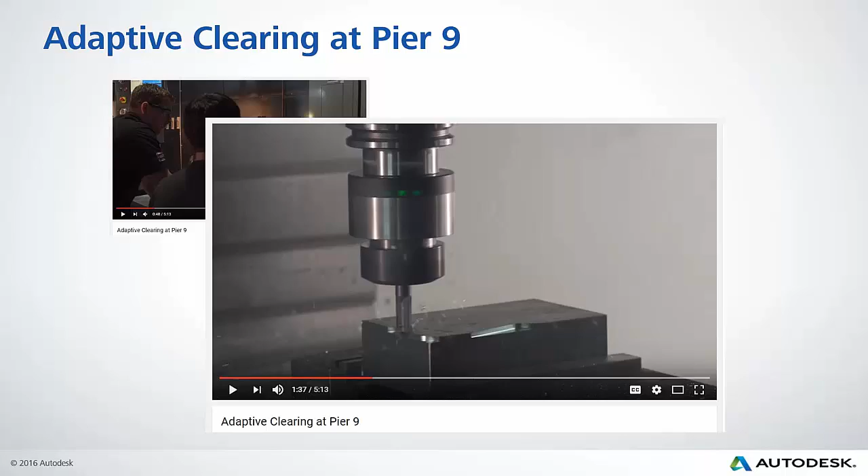What they found was the traditional roughing toolpaths use an offset from the geometry you selected. And those offset passes, that's what your step over is going to be. That's against our optimal load inside of adaptive clearing, where you're keeping the constant radial tool load.

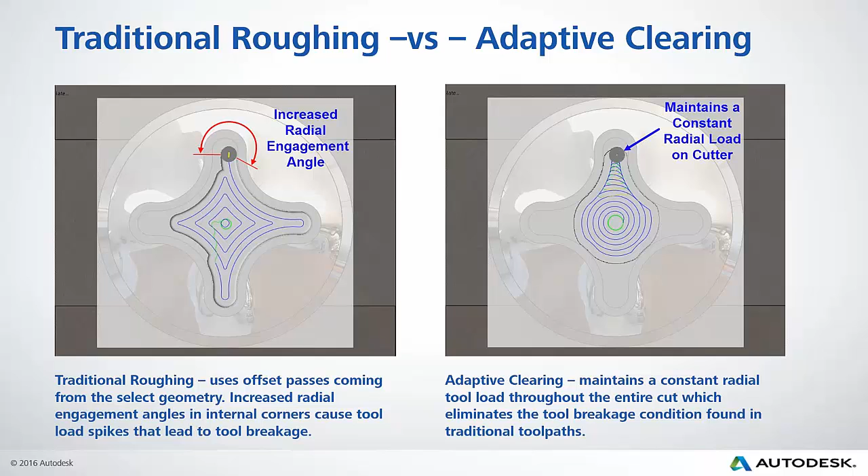So when you take a look at it, traditional roughing increases that radial engagement in the corners, especially when you go into those tight or acute corners, and you'll find that tool gets literally overloaded. It gets buried in the corner, and that's where you'll have a breakage of your tool. Maintaining that radial tool load throughout the entire cut, you can get into those corners keeping that same load on the tool. You're going to reduce or eliminate any of those load spikes that cause it to break. Really good information.

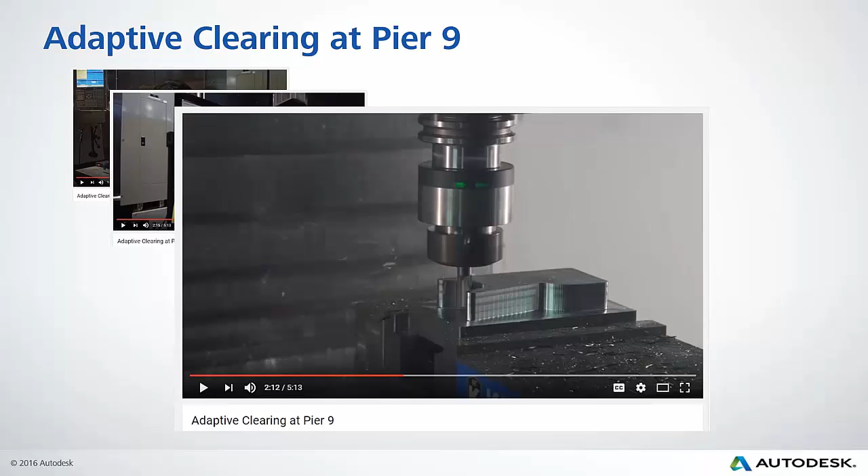This is the feedback. They had constant load, always the same load when the tool's in the material. So they're able to run at higher spindle speeds. You can keep that tool down in the material as much as possible, use as much of that flute length as possible, because you're able to run at a constant chip load. In other words, you're keeping the axial engagement and the radial engagement at a constant small cut, a small bite as it goes along. Really efficient, keeping those load spikes down.

Another thing they show in the video is walking through ways that you can find your feeds and speeds and set up the right feed rate, running your spindle a lot faster. We find that if you run your spindle a lot faster, you're able to cut the material and you're not getting as much heat in the tool. So if you optimize the right tool with the right material and get the right feed rate, you're going to get those parts off the machine a lot quicker, and you're going to save your tool life.

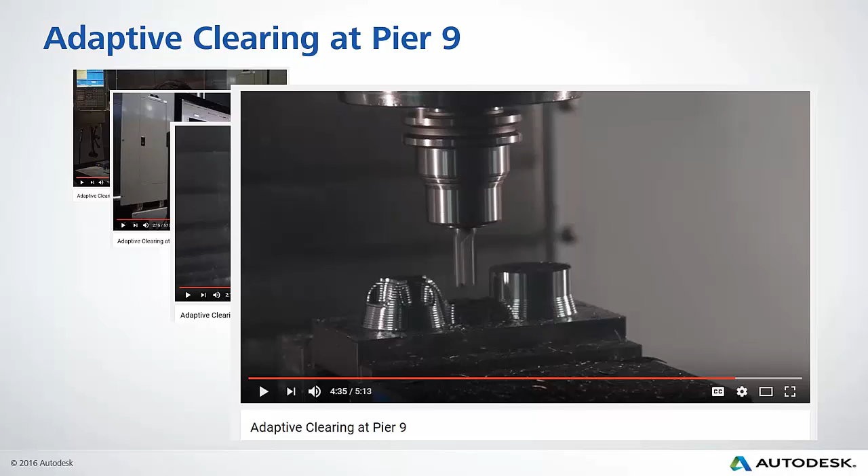They also looked into the step-up pass we use in the 3D to keep a constant amount of stock in the model. And also, when there's a transition from one place in the model to another, keeping it safe and trying to keep the tool down. So these are really great places where we can help reduce those cycle times and increase your tool life.

I want to really hit some points. There's a lot in there that we can cover. It's going to be tough to do in one webinar, but I'm going to try to hit some of those points where we find a lot of questions and things that I think will be beneficial for you. Using adaptive clearing for facing, using the tool shaft and holder to check that adjustments are made in the toolpath so that we're not going to gouge the material or our part. And also our stay down level. We're going to explain more into what that stay down level means.

Okay, so let me bring up my SolidWorks and we'll get into the toolpaths. Just to give you an idea, I have some of these toolpaths on this part right here. I'm going to zoom in a little bit. Just like the traditional toolpaths, you'll see they're offset toolpaths. In other words, it takes a step over that's offset from the geometry you selected.

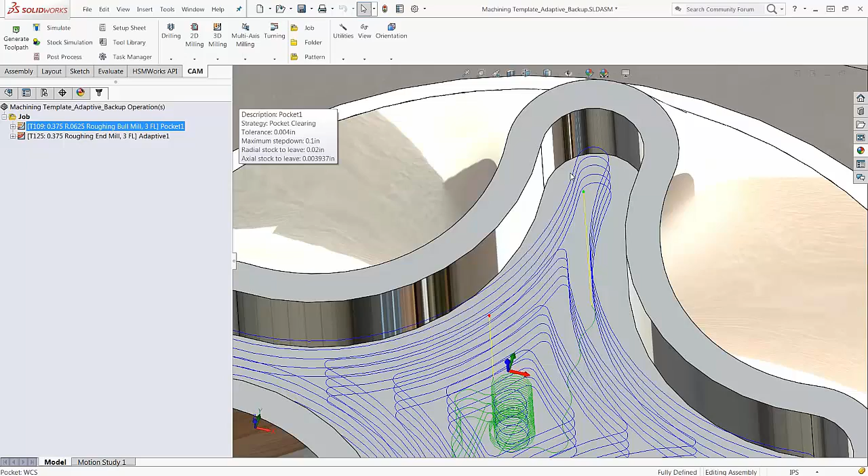Traditionally, we'll take a look at the first time they work with these offset toolpaths, trying to get it to work, but you notice when it gets into those little corners there, as we saw in the diagram, that's where a lot of the load is on the tool. So what they'll do is they'll run really slow. They'll have the tool go in really slow into those corners. They'll slow their feed rate down at the machine and work their way through the pocket. And you'll also have shallow step downs to try to keep the tool from breaking.

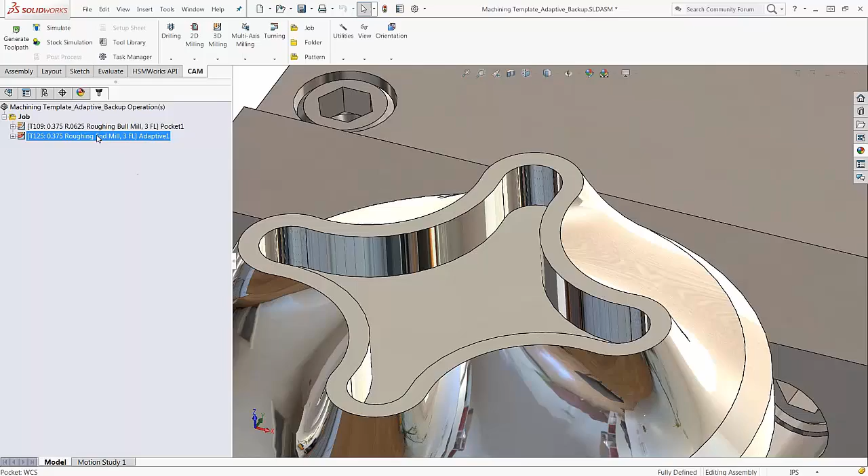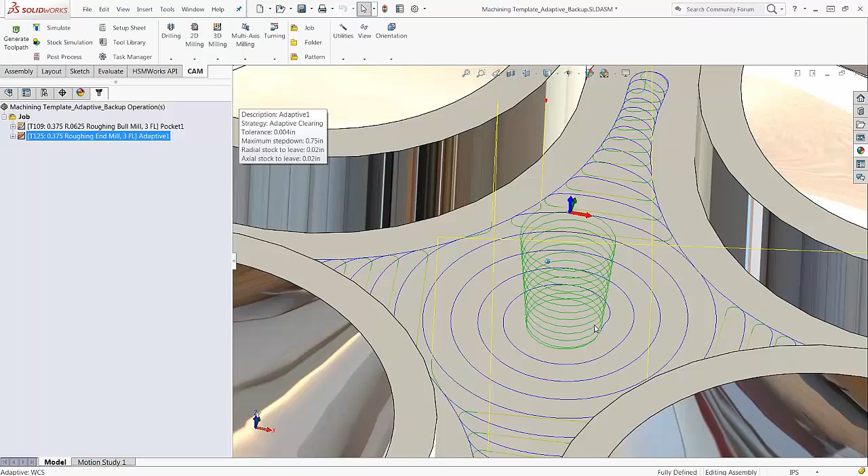So what we do in our adaptive clearing is we helix down into the material using as much of that flute length as possible. As it helixes down, I have a taper helix here, which helps that swarf get out as you're working your way down into the material. It gives room for those chips to fly out, as well as it prevents recutting of the chips and work hardening. So as it reaches down to the bottom, it keeps that same constant chip load, that same radial engagement the entire time as it works its way into the material.

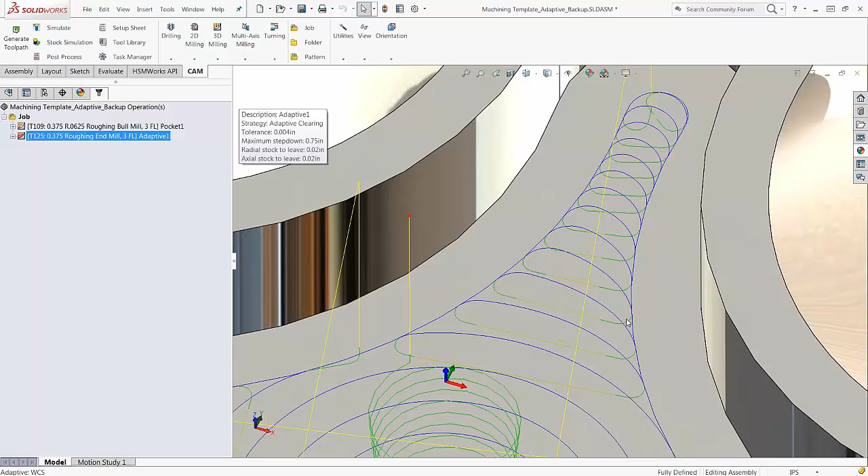So you can run at your higher feeds and your higher speeds because you're keeping that same size chip the entire time. As it works into those corners, again, that same size bite, and where it can't keep the same size chip, it backs out, comes back in for another bite. And that's how the adaptive clearing works, really high efficiency clearing. So as it works its way into that pocket, you're not going to see any burial.

And when it reaches a point in the corner of the pocket where traditionally you would have a broken tool, this is actually going to take that small little bite. So it's not going to bury the tool. You'll get your parts off the machine a lot quicker. You can run higher speeds, and you can trust that it's not going to give you those load spikes in the corner. Really good toolpath, really good algorithms, high efficiency machining.

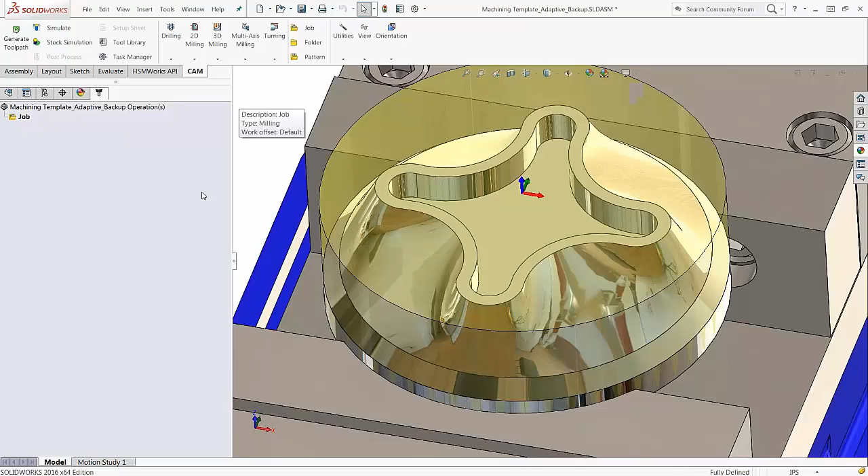So let's take a look. I'm going to walk through setting one up. So let me delete these out real quick. I'm just going to right click, delete. I'm going to start, this is my job setup. So I'm going to add a 3D adaptive clearing toolpath.

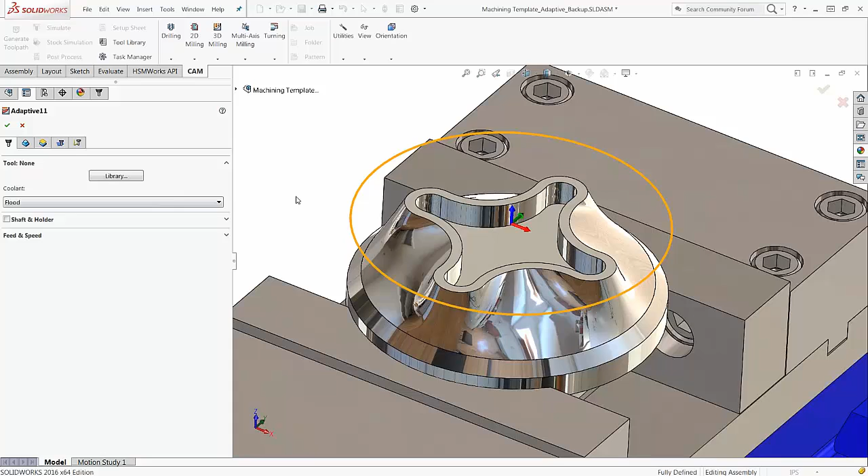So if you're new to working with HSM, and you're new to adaptive clearing and any of our toolpaths, one thing you'll find is they're really simple, really easy to use. It's always the same workflow as you go through setting up your toolpath. So all of our toolpaths have the same workflow, really easy to learn. So working from left to right, I would select a tool. If I go to library, I can select a tool out of a library.

I suggest making a library that matches the tools that you have in your machine, and you can set it up by machine or by material. For aluminum tools, I have my feeds and speeds set up for my aluminum tools. We have a library here that was set up for Pier 9 using the same library that they use there for the tools that we work with. So you can also import and export your tool libraries.

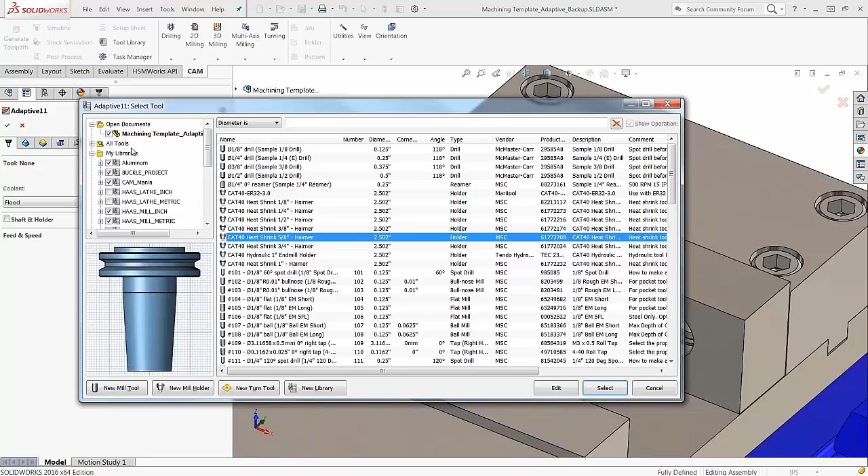I'm going to select a tool out of this library. These are tools that I was working with previously. I'm going to select it, and it brings it into my graphics view so I can see it. Actually, you know what, I want to face this off first before I get into those pockets. So I have that stock there that I want to remove from the top of my stock down into the part. So I'm going to choose a face mill from my library into my adaptive clearing toolpath. Now with a face mill, I can use adaptive clearing to do a facing toolpath.

All I'm going to do is go over, and we'll talk about more of these things as far as the geometry and the heights are concerned. Actually, let's get into the heights. What I want to do is change that. Instead of being model bottom, I'm just going to change it to model top. So I'm looking at from the top of the stock down to the model top.

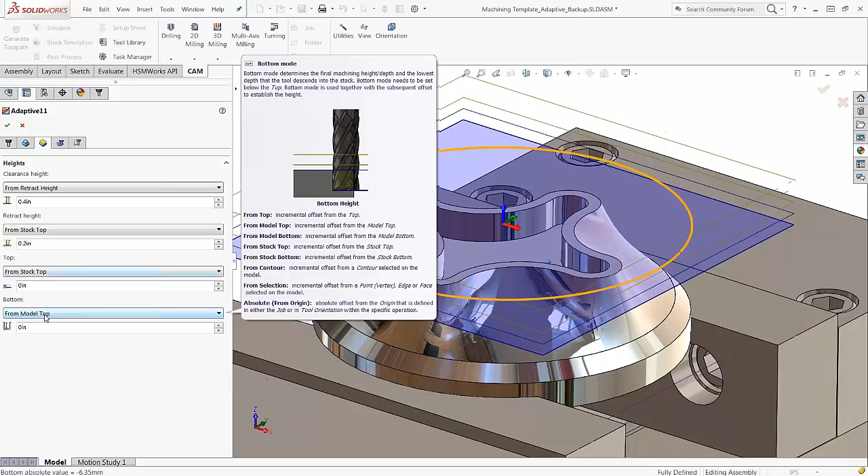In my passes, again, we're going to talk more about these things, but you see this yellow exclamation point giving me a warning saying my step down is a lot more than the flute. And I have a face mill, so I don't want to go too much past 1/10 of an inch, or else I'm going to be at the top or the bottom of the screw holes, and I'm going to pull my inserts out. So let's say we do 50 thousandths step down. We're going to talk more about these other settings, but I'm going to leave it at that. I'm going to say OK.

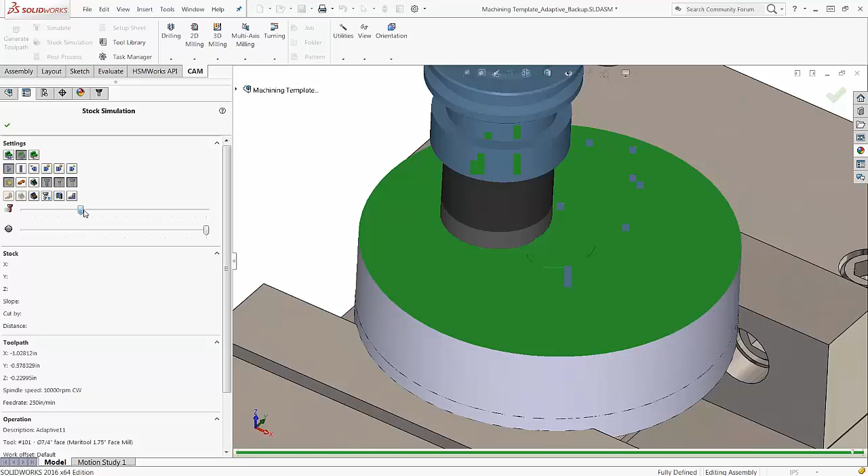Okay, and we get this adaptive clearing facing on the top of the part. So I'm going to simulate it so you can see it. Go to play, and it's going to face off the top of the part using that adaptive clearing. Really, really efficient way to face off the part. So we have a traditional facing, but this is a good way to do it. It's a neat trick to be able to face off the top. Okay, and I like the way that that worked. I want to save that. I want to use it.

There's my report. So what I want to do is I'm going to create a template. So I'm going to right-click on that toolpath. I'm going to go down to store as template. So storing as a template, I can save any toolpath and I can reuse it later. I did it earlier, but I can overwrite the one I have here. But you can save a template.

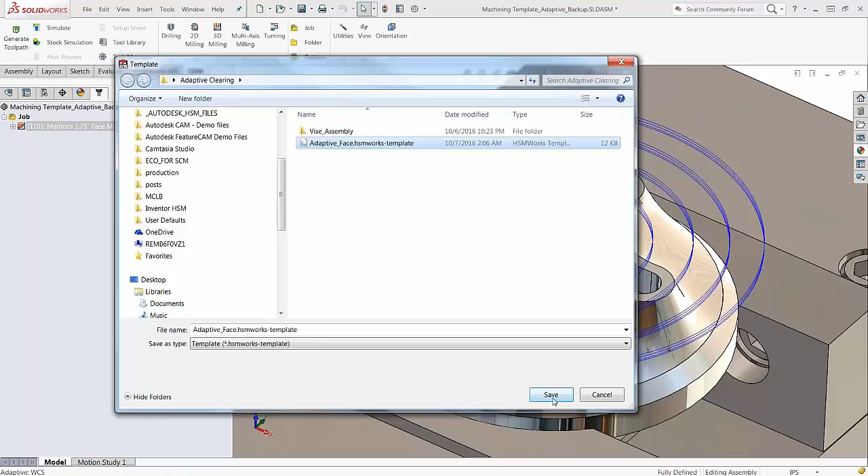It's a good idea to create a library or a location, maybe even on your network, that you can share them. But it's a good idea to create a place where you can save your toolpaths. So as you create them, you don't have to recreate the wheel. You just reuse what you've done before. In this case, we can save it as an adaptive face. I'm going to say yes. And now, I'm just going to delete it for a moment just so I can show you.

If I bring in a part and I want to be able to get that adaptive on it, I just right-click. I'm going to say create from template. I can choose where that template would be. In this case, I have it set in that adaptive clearing folder. I can bring it right in. And all I have to do is regenerate the toolpath, it recalculates, looks at the part, and applies exactly that same adaptive face.

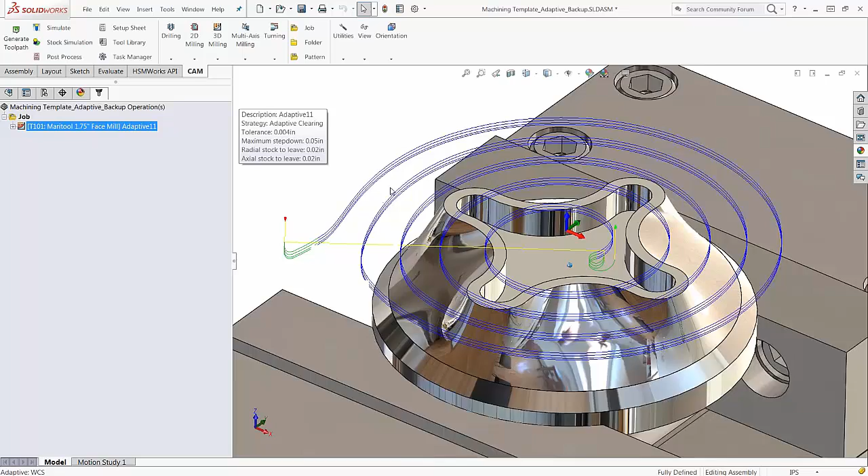Wayne, I'm going to jump in because there's a great question here. A user wanted to be able to apply a finish pass in Adaptive, and templates is a great way to do that. So you could have done a derived operation. I just want to point out that a template can be a series of operations too. It doesn't just have to be one operation. So you could create a template of your roughing operation plus your finishing operation together.

Absolutely. That's a good point. Thanks, Al. So you can do that. You can create your derived operations. You can have your roughing and finishing operations set up, and then save all those as a template and bring them into your part. So I'm going to walk into another 3D adaptive.

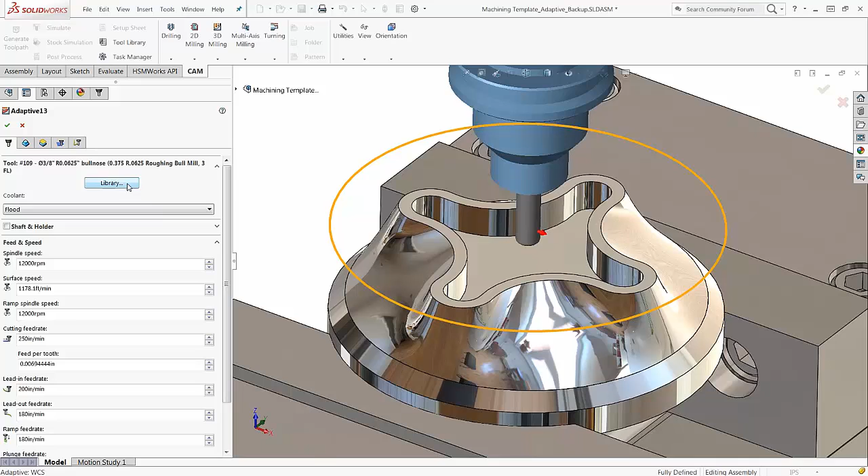I want to be able to cut the part. I want to cut inside the part, so I'm going to go and select another tool out of my library. I'll use this 3/8 bull nose. Select it. I can see the tool, brings it in. Now, if you're new working with the toolpath, working from left to right, we select the tool out of our library. The next step would be selecting any geometry. Now, for the 3D toolpath, it's really about setting boundaries where we want to keep the tool in that area.

So when you select different boundaries, we have our bounding box, which is relative to the X and Y of your WCS. It'll give you a box around the part at the extents of the part, as you can see in the picture, and that'll be where the tool will be kept. And we also have the silhouette, which is a projection of the shape of the outside of the part, and that's what it's going to use. We can also select specific geometry. Now, if we select none, it'll use the stock, as you see here, as a contour on the stock automatically.

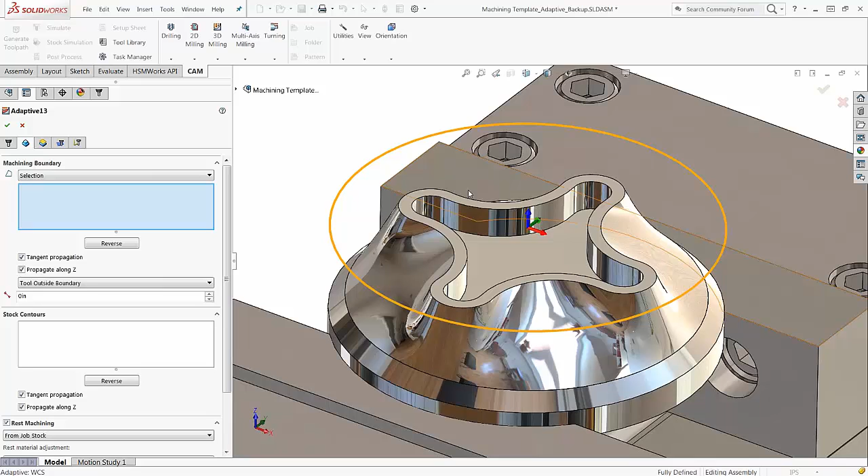So here I'm going to do a selection, and I can keep the tool. I just select geometry right off the model. It projects it into the plane where I'm going to be working with it. And now I'm going to use that as a boundary to keep the tool inside that area.

So I can keep the tool inside. Other settings we can do: rest machining. Rest is remaining stock, is what rest is meaning. And we can do that remaining stock if we have previous operations. In other words, we have a previous operation which is our facing, but our facing didn't do anything inside that pocket. But we can do previous operations.

We can select specific operations. We can also work with a file if we have another file. Pick solids. You might have a solid model that represents your previous operation, or even from your job stock. So we're going to leave it at job stock so it recognizes the stock that we're trying to remove into the part.

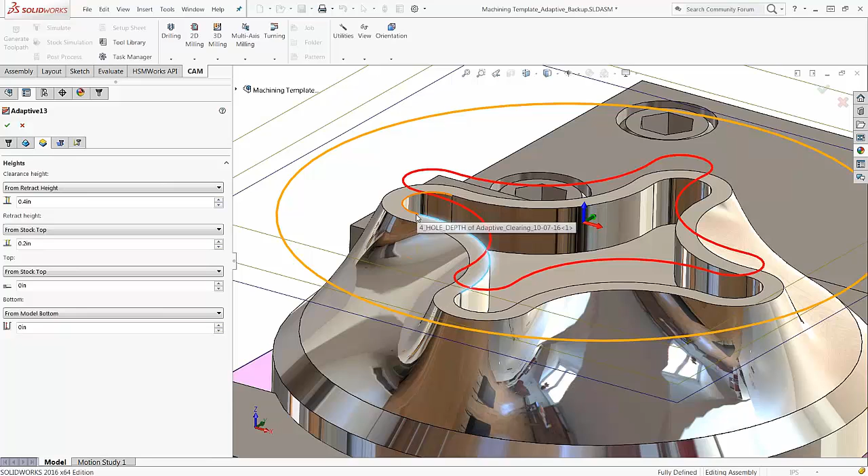Okay, before I do, I want to make sure that it doesn't cut anything above the part. I know we already machined off the top of the part, but I want to make sure that the tool stays down inside of that pocket. So what I can do is, instead of choosing my bottom from model bottom or my top from stock top, I can say from model top. So it's real easy to work with the heights.

You can select heights off the model. You can select specific positions off the model. You can also choose the model itself to regulate where the height of the tool is in the bottom of the tool, where your clearance and your retract will be. Really quick and easy to use.

We're going to get into our adaptive clearing a little bit as far as our passes are concerned, but I want to show you right here is where you can set your optimal load. We talked earlier about setting that optimal load, keeping that consistent radial engagement the entire time. If we right-click in this field, we can go down to Edit Expression, or you can hit F2, and this brings up the expression window, and this is what's driving that optimal load.

It's the tool diameter of the tool we brought in multiplied by the factor here of a quarter of the tool diameter. We can change this if we want to get a little bit more aggressive. We can make it 35.

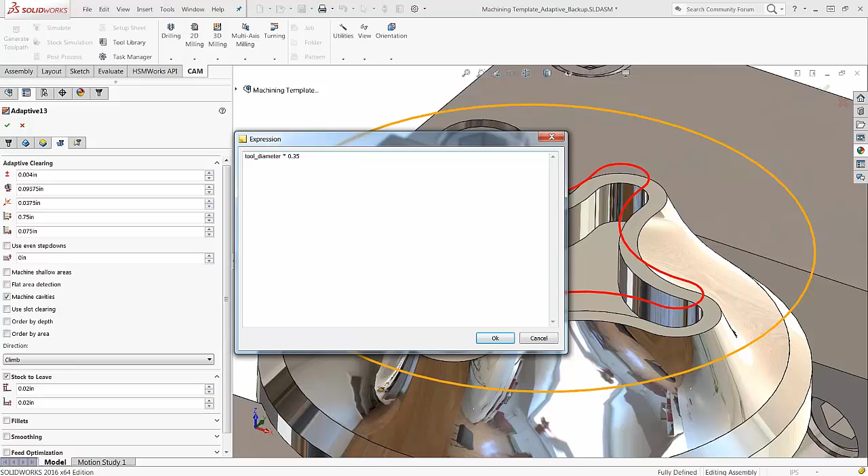Again, work that out. When you get your tool and you find the right tool for the job and you have your manufacturer's recommended feed rates to start with, also take a look at that video that Al put together with some tips on being able to build up your feeds and speeds to match what you're trying to do. But here is where you can fine-tune that, and you can put that information in to keep your constant radial engagement. This is what's driving it. So I'm going to say OK, it calculates, and it gives me that new optimal load.

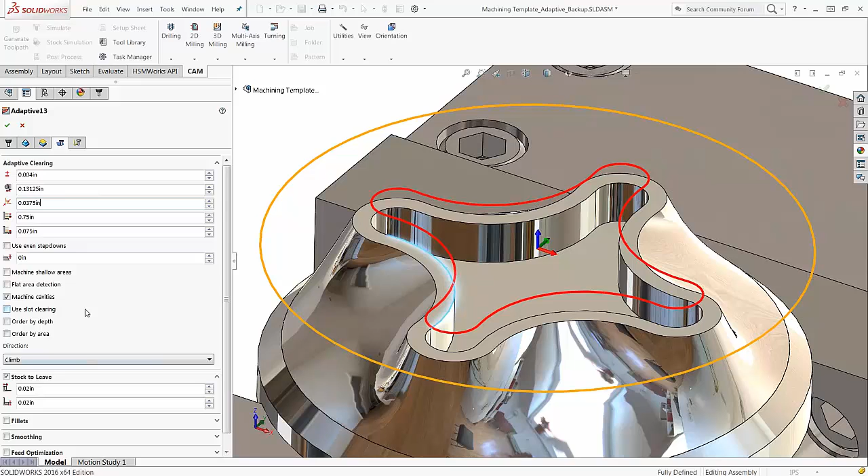So I want to point that out. You can do that on all of these different fields. This is the minimum radius that the tool will look at when it gets into the corners. If I hover over, it should give me some pop-up: minimum cutting radius, and we'll take a look at the difference here. But again, this is when it gets into those corners, you can avoid having that tool go into a corner where it may not be most efficient to be able to remove the chips. So we'll walk through some of these when we get into the other aspects of the 3D. I just want to point those things out.

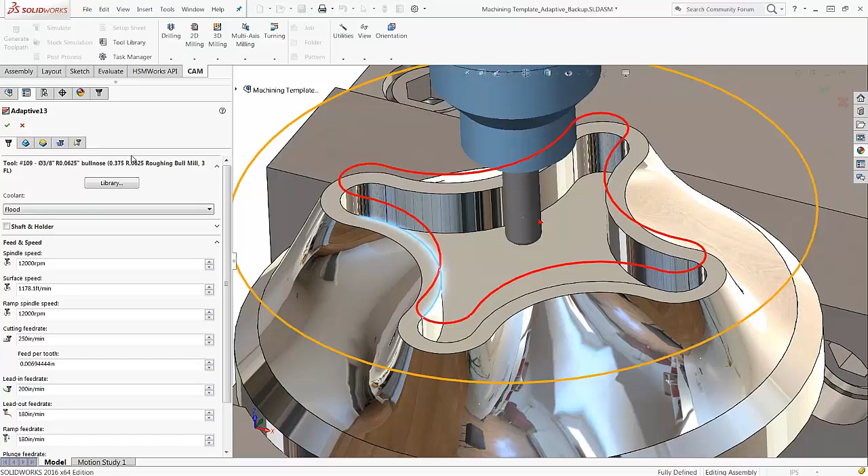So I'm going to leave it there. I'm going to say OK. It's going to calculate, and then I'll have that adaptive clearing on the inside of that feature. Okay, so I was able to bound it. Now I'm going to right-click, I'm going to edit that, and I'm going to change it so I can cut the outside of the part. So all I'm going to do is remove my boundary and say none.

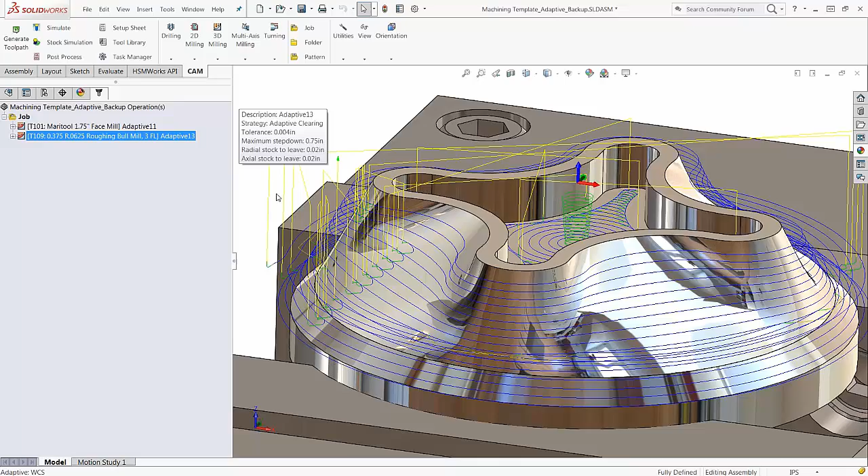Hit the green check, it'll calculate, and it's going to look at everywhere on the model where it can efficiently remove those chips. It's going to try to keep that tool engaged with the model as much as possible without interfering with the model, without hitting the model. So it really respects the model very well.

And if you notice, you see a lot of these retract moves are here. Actually, I'm going to show you, there's another place where we can see a lot of them too. So I'm going to go to edit, I'm going to go into here and I'm going to show you. Down here we have our linking parameters. Linking is where we can change those retract moves that we see here.

I want to point out too, before we go to change those, that the tool is going to work its way. The algorithm is going to take a look at the most efficient passes. It's going to work its way up the side of the model here, and it's going to try to look at where it can leave the most efficient stock, or at least a consistent stock, as it goes through to remove the chips. So we can take a look at that.

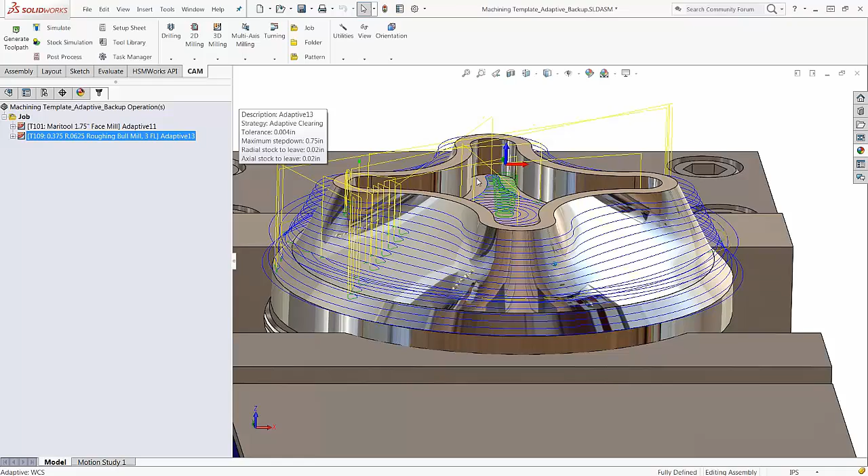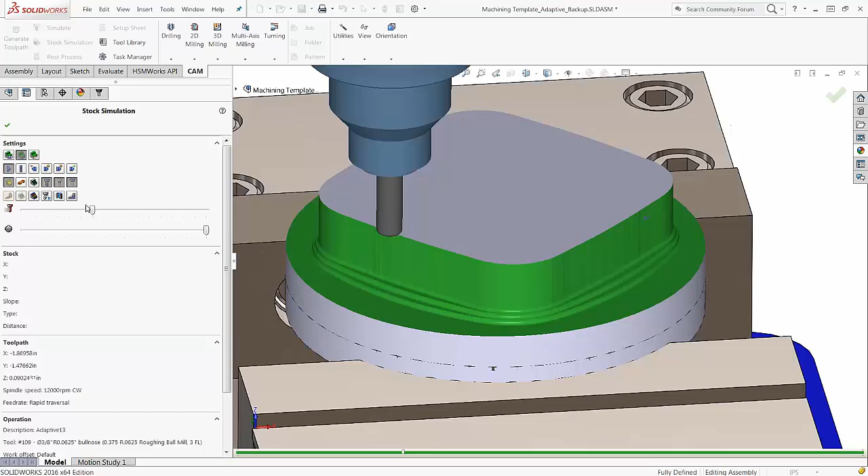I'm going to do a stock simulation real quick just to show you as we walk through. So it's using as much of that axial engagement as possible, as much of that flute. You see it's getting pretty close to my holder there. Okay, we're going to take a look at another setting for that in just a few. But you see it started where it can get the most efficient cut going around the part as it steps its way up. Looks like I hit down here.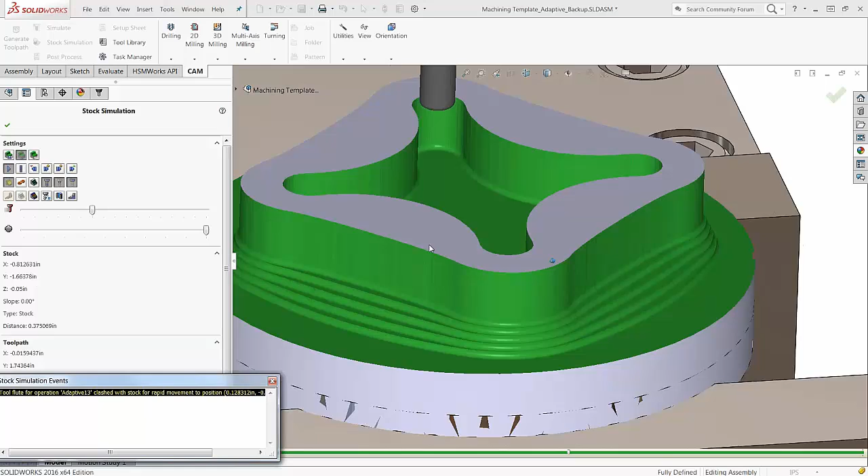I don't think I selected to do the face, and that's why it looks like it hit. So I only selected the one toolpath, but if I select the face, you'll see that won't be there. But there it's working on the inside. Then it comes out and looks at the next level where it can get the most efficient cut. Okay, so there it worked up the walls, and it worked the inside, again, keeping the most efficient engagement it can.

Okay, so you might see some retract moves in here, and sometimes you might not want to see all those retracts. You want to see them more minimized. What you can do is you can edit and go into the linking parameters. Some of the questions that we get often are about understanding this, the retraction, the stay down level, and how we can adjust it to keep that tool engaged as much as possible in the most efficient way.

So when we look at our retraction policy, this is really looking at whether we're going to retract all the way up to the full retract level, or if we're going to have a minimum retraction. In other words, when it moves from one place, it's going to retract out to move over to another place where it can safely re-engage the material where it's making that most efficient cut, because it's going to avoid hitting any of those bosses or any of those areas.

We can have a minimum retraction where, instead of going all the way up to the retract level, it's going to find a really safe way to move around but keep the tool down as much as possible. Here, what we're looking at is our maximum stay down distance. Because with the adaptive clearing, it's going to keep reevaluating the material, the stock, and the part to keep getting that most efficient toolpath, to keep the tool engaged as much as possible.

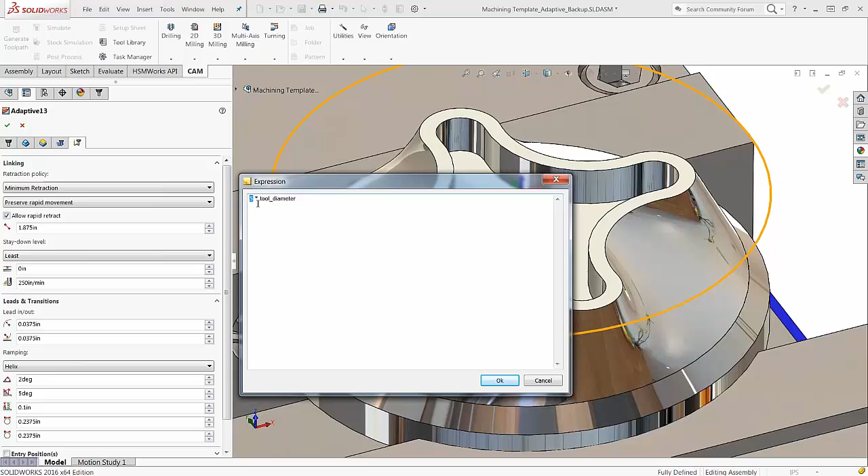It's a factor multiplied by the tool diameter. So this is the way it would come in as default. And if I wanted to make, let's say, 20 times the tool diameter, what I've done here is I've increased the area that it's going to look. So when it goes to retract from one spot in the material, or when it's cutting here and it can't efficiently keep cutting, it's got to move to another area, it's going to increase that area where it's going to look for another place to move in.

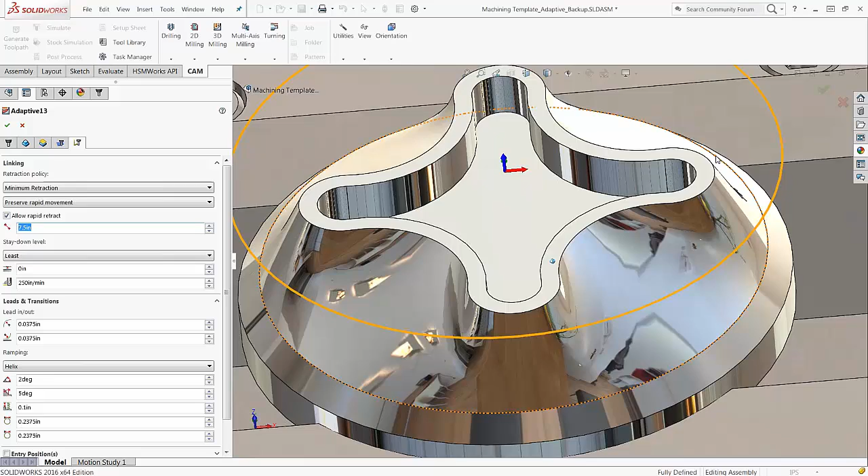So again, it's looking for that most efficient cut, the way it can remove the chips in the most efficient way, keeping the tool engaged as much as possible without hitting the model. So our stay down level, within that distance, we can tell it a certain percentage of that distance to stay down. So here it's looking at, if we did least is 0%, in other words, it's going to keep retracting as much as possible without hitting the model.

What we can do is we can increase this. Let's say 30%, we can do 50%, and we're doing 3 3/4. So if we're doing 50% of that distance, it's going to look within that 50%, that 3 3/4, it's going to say, can I stay down here? If it can't, it will retract and move over to the other area. So that's really what it's doing. But one of the trade-offs is you get less retract moves.

One of the main things that we do this for, sometimes you have a machine where your rapid speeds aren't that quick. Your machine might not be able to get your rapid up as close to your high feed. And so those retract moves take time. They're not as efficient. You don't get the part done as fast as you can.

So if you can have your tool stay down, move to the next area that's closest and more efficient, it'll do that. You can enable that with your stay down level, but that's really what it's doing. It's trying to keep that tool down so you're not doing those retract moves and taking that time. So it's trying to keep it down as much as possible. You can also say I have a specific feed that I'm trying to do as it goes from one area on the part and tries to stay down.

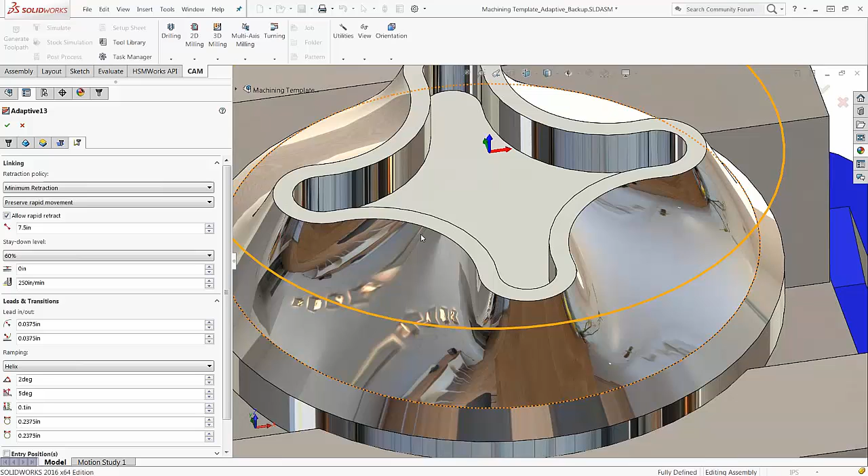So the stay down linking, for people who have been using it a while, there's a maximum stay down distance up top that Wayne was talking about. That's 7.5 inches. That's if it can just find a straight line between 2 points. But that's also an overall maximum distance. And then we have this new linking that's going to find the safe path, this stay down level percentage.

It'll find a safe path, and it'll jog through and it'll go searching. It's aware of the stock, whatever your stock model is at that time. So as much as you've roughed, that's the model it's using, and it's trying to find a way to get to where it needs to start the next cut.

Well, the way the calculation works is it first calculates the rapid movement that Wayne was showing you. It comes up, it comes over, it goes back down, that sewing machine, because that's a very fast calculation to find out how long that distance is. And then we know how long that is. So let's say that distance is 1 inch up, 4 inches over, and 1 inch down. So you've got 6 inches of motion. And now we set the stay down level to 50%.

So that's saying if I can find a stay down distance that's half as far as my rapid distance, I want to do that. Why would you do half as far? Well, usually your rapid is 2 times faster than your cutting move. So it says 50%. So it starts looking, and it's trying to find something. It's hunting its way, and it gets to 3. It says, I'm going to stop looking. I'll just use the rapid.

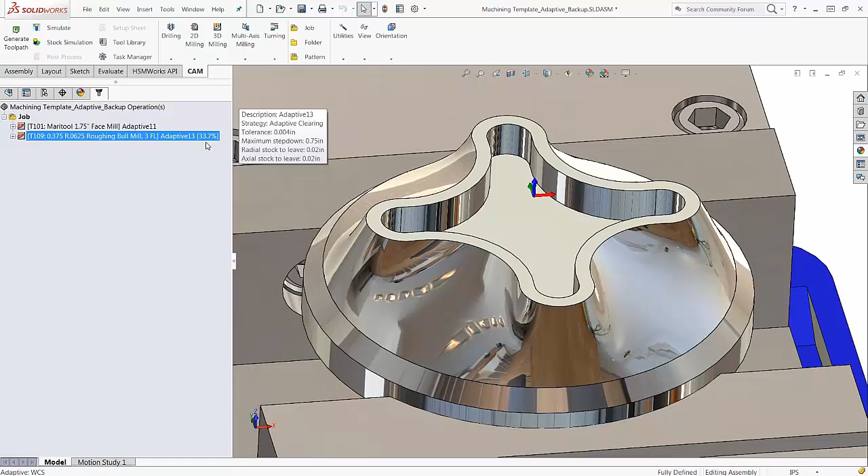Thanks for helping out. So as you can see, it's going to take a little bit longer to calculate, but as Al had mentioned, it's going to take that long because it's looking for the best shortest distance it can, or at least where it can stay down. And you can see you're getting all those stay down moves right here. You don't see all those large linking moves going from one side of the part to the other. So you can really reduce your rapid moves.

You can keep the tool engaged in the material much more efficiently, but that's the trade-off. If you have larger parts, a lot of tool paths that you're working with, it'll take a lot longer to calculate. Very cool. Thanks, Al. So I want to show you something else that we're working with here while I have this tool path.

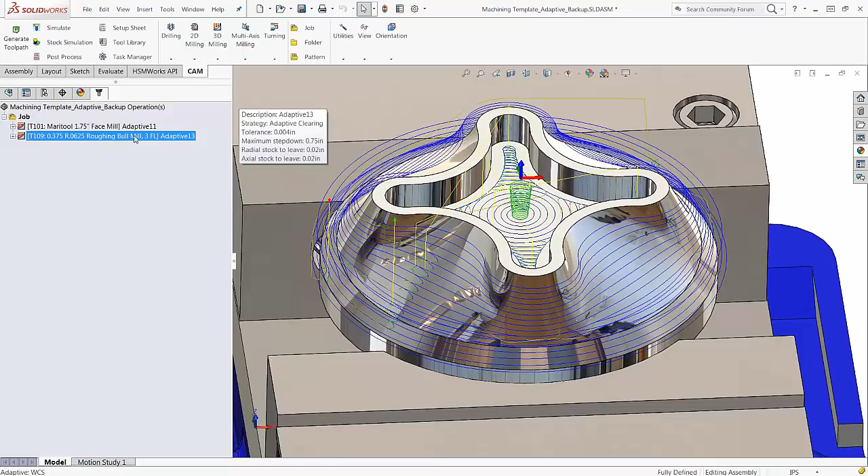Now, let's say I only wanted to cut the outside, and I don't want to cut the inside of this part. Let's say I want to do that with a different tool path. If I go in and edit, what we can do is in our passes, oh no, I'm sorry, not my passes, in my geometry. I'm actually forgetting where I am here, Al. I can, oh no, that's it. I want to machine. Sorry, guys. My brain is going somewhere else here. So one way I can do that, it's right here, machine cavities.

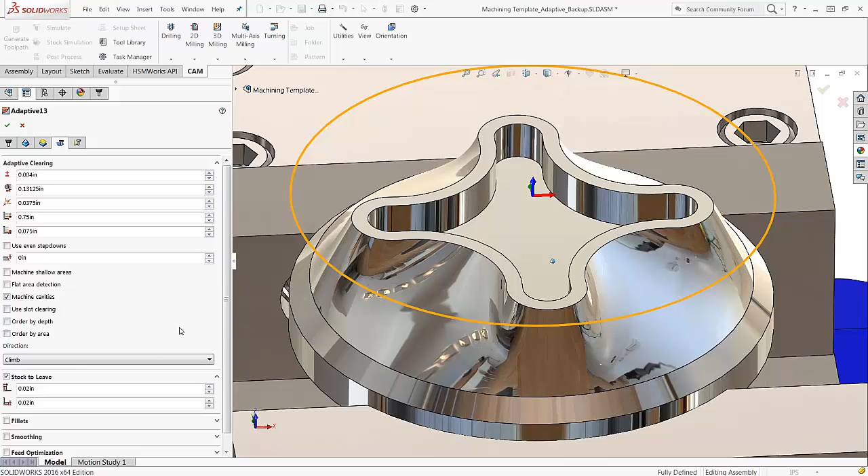A couple questions here that I'm going to answer. Sure. So I'll let you jump back in. There's one question regarding how do you avoid clamps. It is in our backlog to add automatic fixture avoidance, but a nice little trick is there's a model override in all of the tool paths.

You can define your clamps, and generally I like to draw them oversized when I do this, define them as model, and then the toolpath algorithm knows, well, I can't touch that. That's part of my model. If there's no stock around them, it's not going to go over and machine, but that'll make sure that the toolpath algorithm does not touch them. So that's a bit of a hack, but it will help you force the toolpath to not hit your clamps.

As far as the time savings on keeping the tool down, if you're running prototypes, I would be having all my defaults set to do the safest thing possible. To me, the most important thing in your situation is you want to be able to hit go with confidence. You're not looking at saving split seconds. So I don't think I'd even use the stay down linking, to be honest.

Sorry, Wayne, hopefully you're back to where you wanted to be. Don't be sorry. Thanks, Al. So I had a brain fart there, but I'm back.

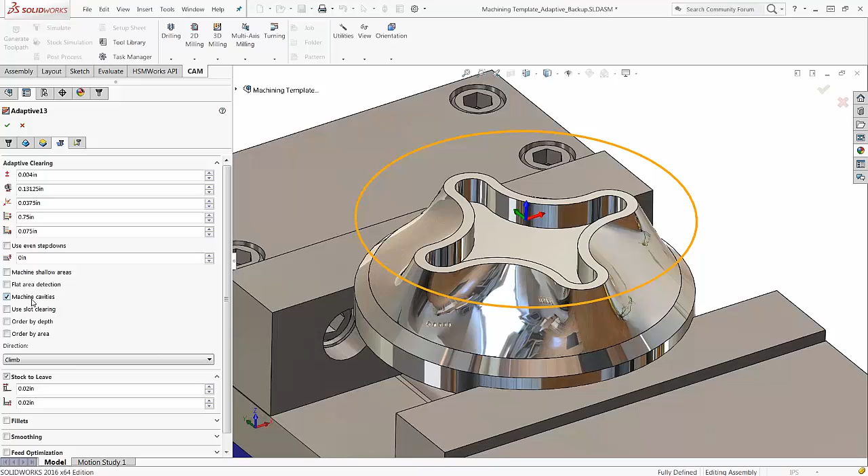So what I want to do is I want to remove machine cavities. What it'll do is recalculate, and it'll look at any place where it's going inside the model. It's going to recalculate, and it's only going to cut on the outside of the model. We kept this at most, so it's going to take a little while to calculate. When it gets there, you'll see it's only going to cut from the outside of the part. It won't try to cut inside the cavity. So that's one way you can keep it from going inside your part, where you don't have to cap it off.

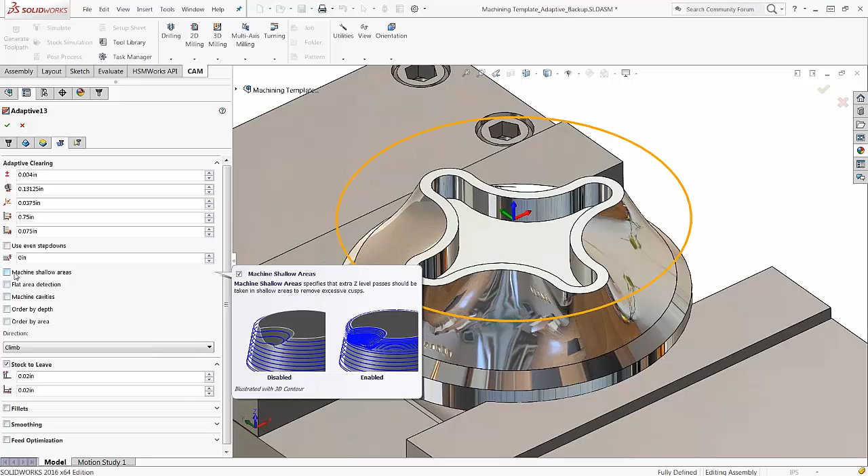So I'm going to go back. I'm just going to change that real quick back to least so we can get a little bit faster calculation. But I want to show you one more thing in here. There's places where we can say machine shallow areas. When it's cutting those areas, it gives you those extra passes around to make sure it gets into those shallow areas. Flat area detection.

So in this case, I have in my part a version of this that actually has some flanges on it. And so it'll calculate in my adaptive. Let me go and regenerate this. It'll calculate, it'll find all those places that are flat in the toolpath and go in and be able to clear them. So it's finding those flat areas in the toolpath as it calculates.

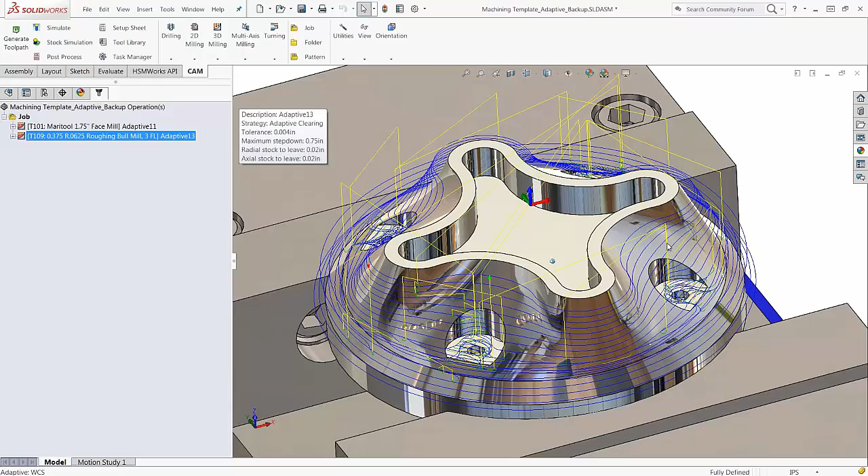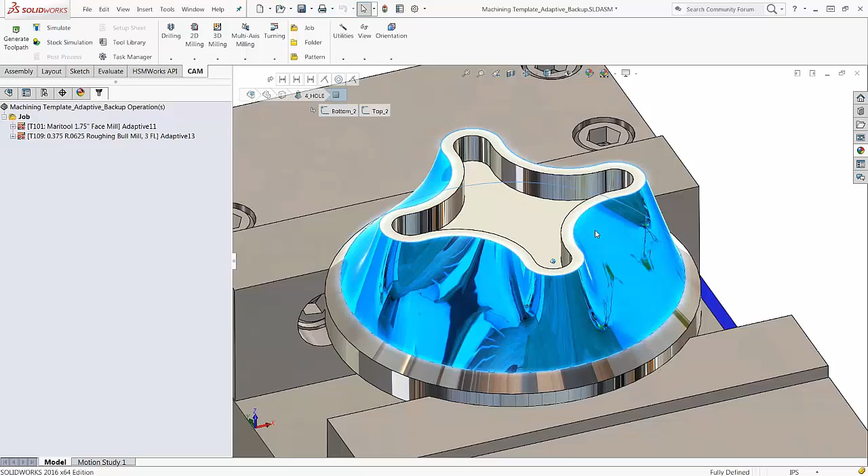Another thing that's important I want to show you, that's going to be really helpful, I'm going to change my model back real quick. Let me go and change this. I'm going to go back to my original. Actually, if we look at our height like this, okay, I want to show you. This is a larger part. We actually have a lot more height on the part. I'm running the same toolpath, so I'm going to go and regenerate.

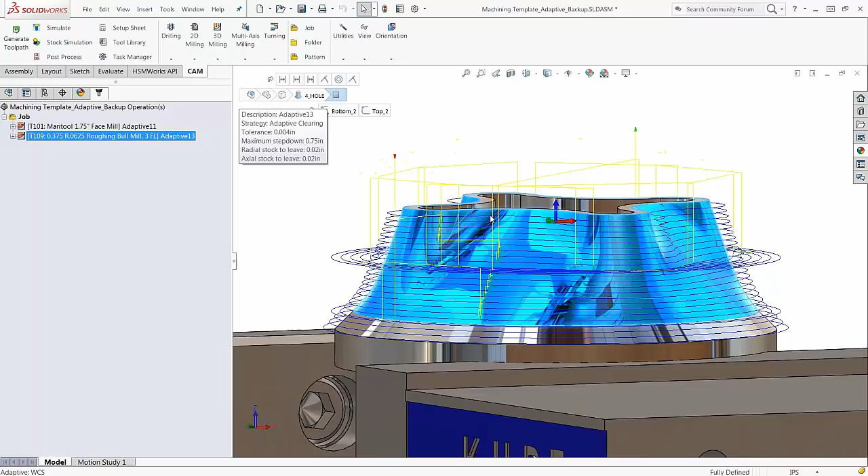It recalculates the new geometry. Okay, it gave me the adaptive face on that new geometry. It raised the part up. Now I have a higher part. But I'm going to go and simulate real quick. I'm going to go to stock simulation and let it play through. And you'll see, as it goes through, there's places right here where my tool holder's hitting on the edge. I want to slow that down, but I'm getting feedback right here that we're hitting right on the holder there.

So one tool that was added by the team in a recent version, which is awesome. I'm going to go edit this. If I go under shaft and holder, you can tell it to detect the tool length, which we'll look at, or pull away. You can have it fail on collision and stop, and at least it gives you feedback saying you're going to hit. You might want to change your tool or find another path. Or we can tell it to pull away.

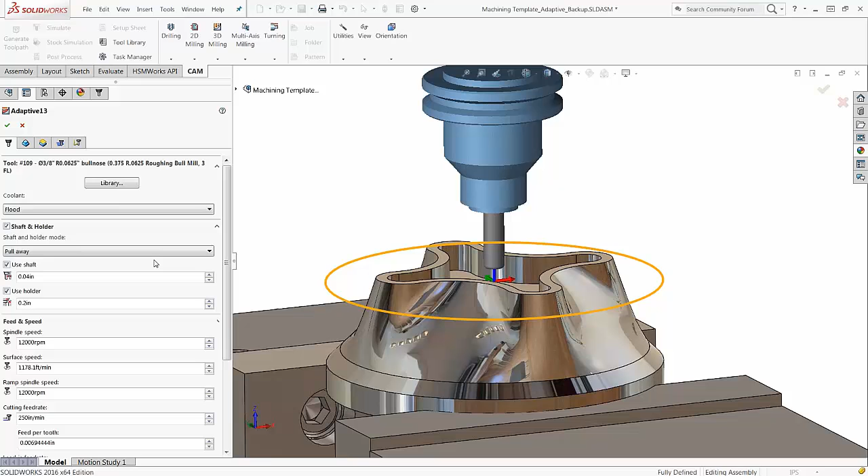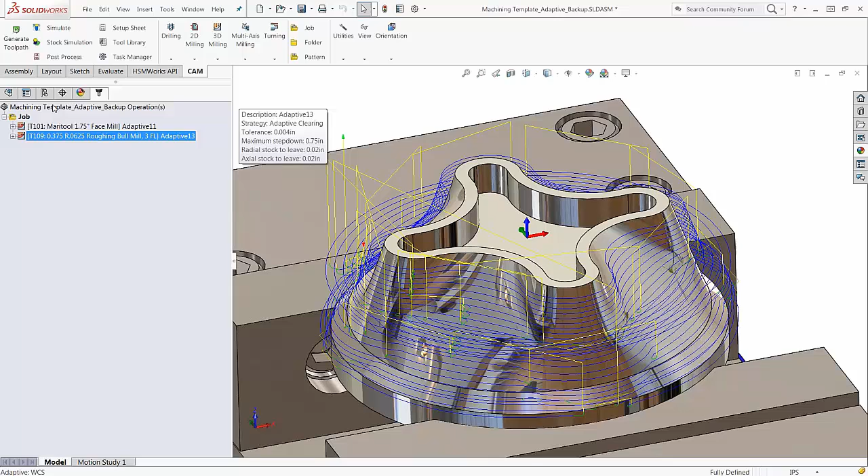So if we take a look at that, we're going to do a stock simulation again as soon as it calculates. You'll see it's going to calculate those places where it's going to hit that tool holder, but it's going to pull away from the material. Okay, let's take a look at that stock simulation. Slow it down a little bit. Go ahead and play. There's our cool adaptive face.

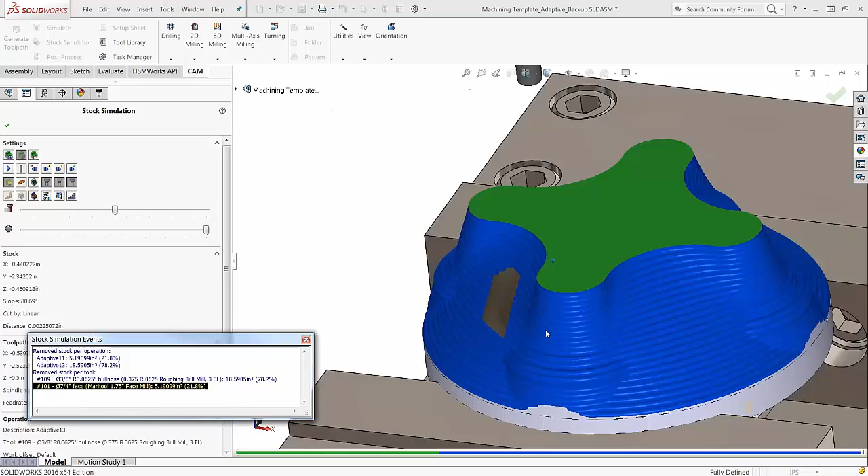And as it works its way into the material, those places where it was hitting the part, I don't know if it's giving me a good simulation here. Maybe I'm speeding it up, but that's just graphics. But it gave me this area right here where it pulled away from hitting. So it recognized the place where it's going to hit, and you can give it that distance that you want it to stay away.

Another way, and I think it's really cool: if we go and edit this, I'm going to change that and say detect tool length. So if it calculates, it's going to go through and calculate the best, most efficient way to keep the tool engaged, and it's going to recognize the places where that tool is going to hit my part. See how it went red here?

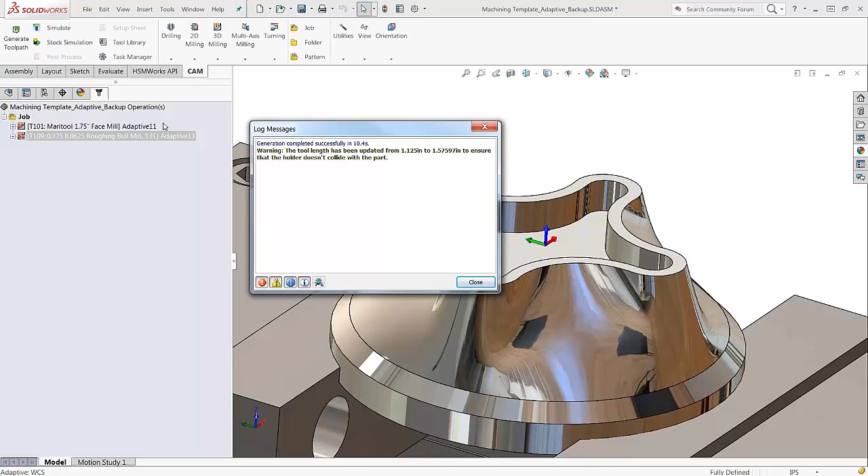I have this red X. I want to take a look. I'm going to right click, go down and show the log, and it tells me right here the tool length has been updated from 1.125 inches, an inch and an eighth, to 1.57597 to ensure that the holder doesn't collide with the part. So this is a good way to help you select the correct tool length that you would need to cut that part. So it updated my tool.

Now if I regenerate this toolpath, it's going to calculate with that new tool length. So I can go back and say, do I have a tool that's 1.5 inches or maybe 1 5/8 that I can put in there to make sure that it's not going to collide?

So two things there. One, that's a bug. You shouldn't have had to recalculate. It wouldn't be the case for any of the other 3D operations. So I'll get that logged. I'm glad I was on the webinar.

The other thing that I think is important for everybody to know is that I talked about adaptive and the stay-down linking being aware of the in-process stock. That's also the case for the shaft and holder avoidance. When it's doing it, it's looking at what material has been removed already by that operation, which is technically unique compared to some of our competitors. Anyway, thank you, Wayne. Yeah, I think it's great.

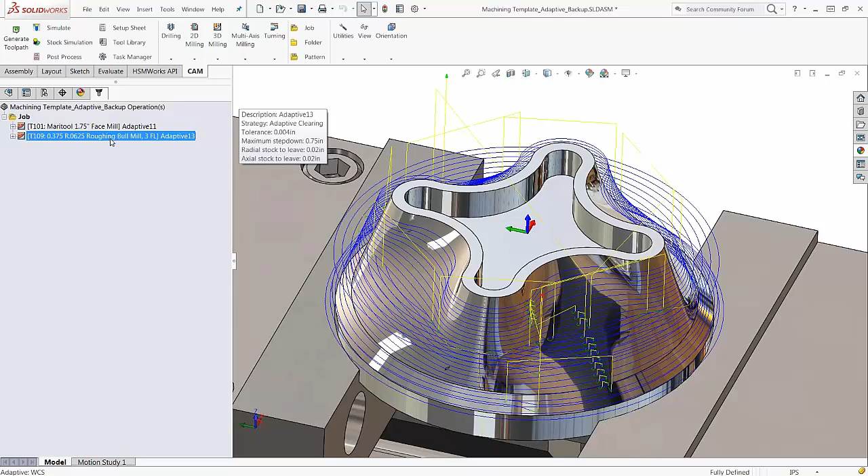And now if we take a look, go into my tool, you can see it's been updated. My tool has been changed to the new cutter that it needs to be. But you can also go back and say, okay, I need at least this much body length, and I need at least this much shoulder, to be able to cut this different part. So it's good feedback, good to be able to work with it. Really nice functionality inside of Adaptive.

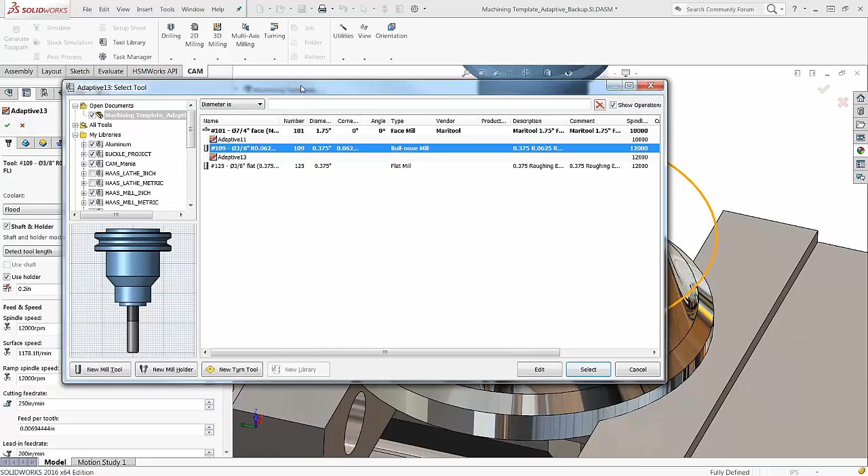So those are some of the main things I wanted to cover today. I know we're getting pretty close to time. We have some time for questions. But that was our deep dive for today. We're going to have a lot more coming up in the near future. Those are some of the points I wanted to make sure that we covered. And I really appreciate it, Al, that you're here and able to jump in and help everybody understand more about what those really awesome functions are inside of Adaptive.

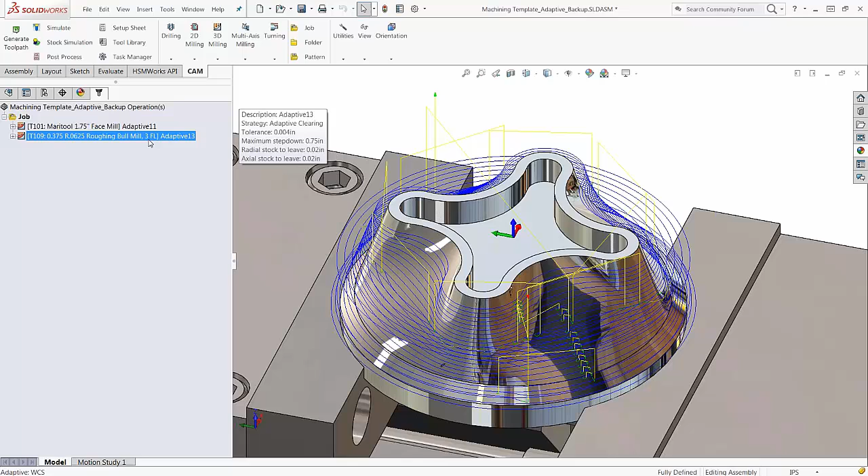So Wayne, you're not done yet. You've done a great job, but there's some questions that I'm going to have you hit on. Awesome. First and foremost, the last question here: is it available in 2D or is it only in 3D? Well, I guess there's two answers to that question. It's not available in 2D, I'm sorry. If you're using Express, then you don't have the functionality.

If you're using the full paid product, I think oftentimes users miss that the 3D strategies are very useful for what I would call a prismatic part, a part where you would generally think you had to use a 2D strategy. So the way to think about 3D toolpaths versus 2D toolpaths: I've got a friend, he's known as the Bear Man. He carves bears out of trees with a chainsaw, and I asked him once, how do you even know where to start? Well, I, for one, am a machinist, not an artist, but that's part of the problem.

He said, well, I just cut away everything that's not a bear. And I've used that analogy a lot because it really describes how the 3D toolpaths work. They just start at the stock and machine to the model. Yes, that makes it great for surface 3D models, but it works very effectively for prismatic parts too, and in a lot of ways can automate things. So if you've got access to the paid products, you have access to 3D, use it even if it's a 2D part. Let's see if there's some more questions that are relevant here.

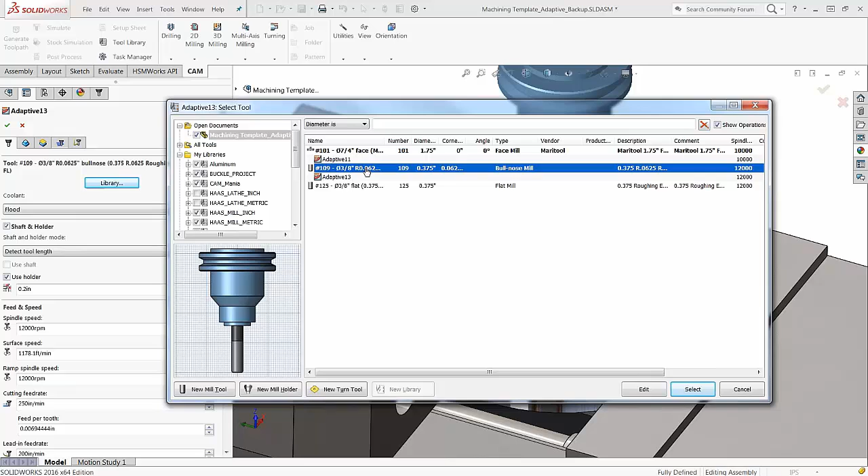Yep, there's a few different ways. You can go right up to this tool library here, or you can do it right inside your toolpath. So if I go into the library, it accesses that tool library, and this is the current tool that I'm working with right now. If I wanted to edit or make any changes to that, I just right-click and edit. You can also hit Alt and return.

Now if I want to change the number, I go into the General tab, and I can make this become number 2 or any number that makes sense for me to work with, and say OK, and it updates, and now this is number 2. And if I wanted to add it to my library, I can right-click. I can copy it. I think I can even do a click and drag in HSMWorks.

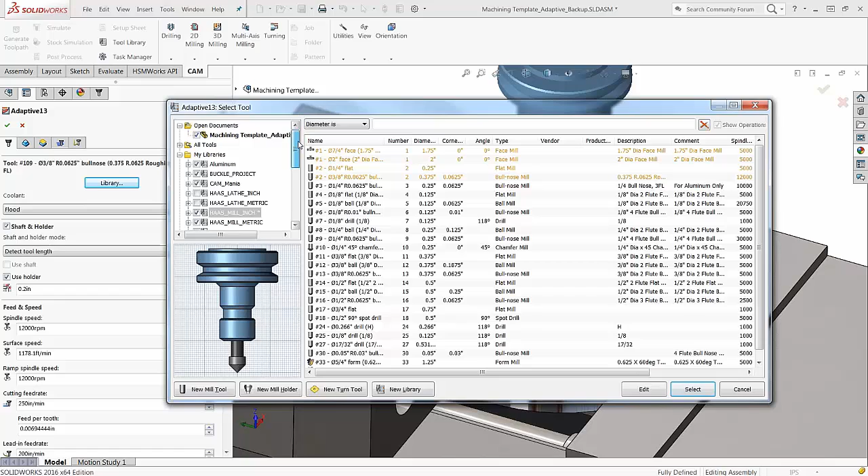But if I wanted to bring it to another library, let's say I wanted to add it to my Haas Mill Inch library, I can bring it into here, right-click, and I can paste it in there, and it pastes that tool right into that library. Okay, so now there's 2 more tricks. So go back to your file there, right there.

Now right-click. And I think what this user is asking for is renumber tools. So the fourth one down, renumber tools. Click that because I want to show 2 tricks. Yep. You can have your first tool number and then the increment. So you can say I want to start at tool 5 because the first tool in your machine is a probe, and the next tool in your machine is always your face mill, or whatever that might be. So renumber and increment by 1.

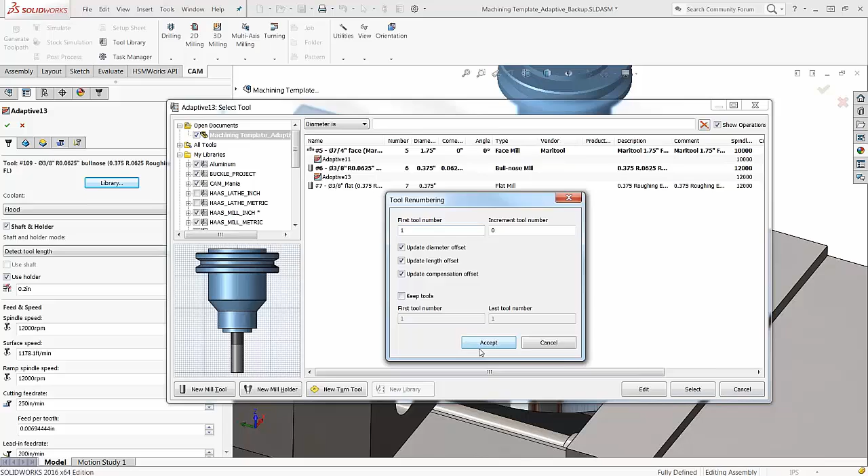The other trick, Wayne showed adding a tool to a tool library. What I like to do is actually do my increment to be 0 at 0. And what that'll do is actually strip all of the tool numbers off, and I do that a lot when I'm putting my tools in a tool library. That way the tool has no tool number, and then when you select it for the first time, instead of having a tool number, it just logically selects the next one, and that can minimize your need to have to renumber tools. So a couple little tricks.

You can renumber tools in your library, starting at 0, increment by 0, and that strips the tool number. It's not going to work in a file because it needs a tool number in a part file, but in a library it can. And then when you use it, now it just grabs the next available tool number for that part file.

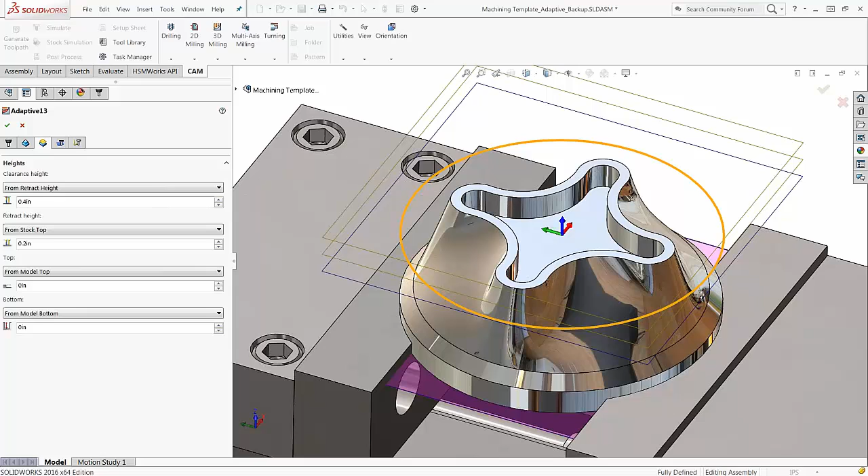The next question we had here came up a couple times. Wayne, can you just pop over to the Heights tab? There's some questions around how the Heights tab works. Okay. So in Heights, we're really easy to work with. It shows you where your clearance height is. Clearance height, this is going to be where your tool is going to go to make sure that you're clear of any fixtures or the stock or the part, anywhere that you're going to be clear from hitting anything.

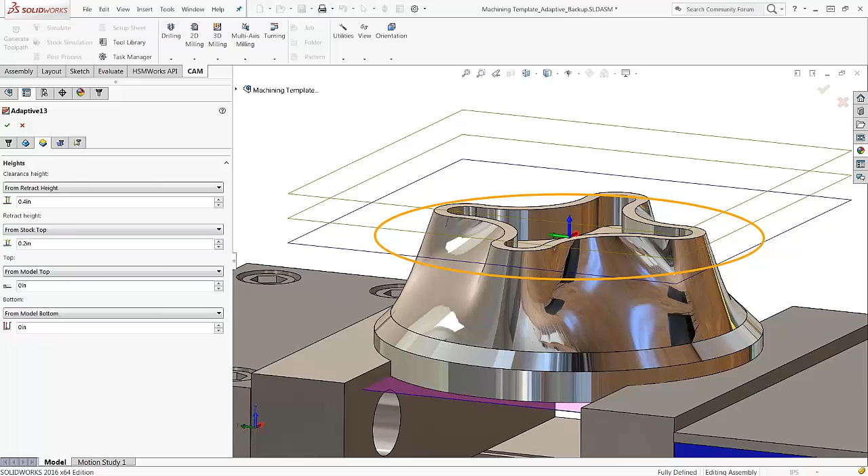Your retract height, this is where the tool is going to go in between sections of your toolpath or moving from one place in the toolpath to another, where the tool is going to retract safely away from your stock or your part. Your top height, this is the place where your feed is going to start. So your top height is the top of the part; if you're approaching in the Z, that's where you're going to start feeding into the part itself. And then the bottom, of course, is where the bottom of the tool will be.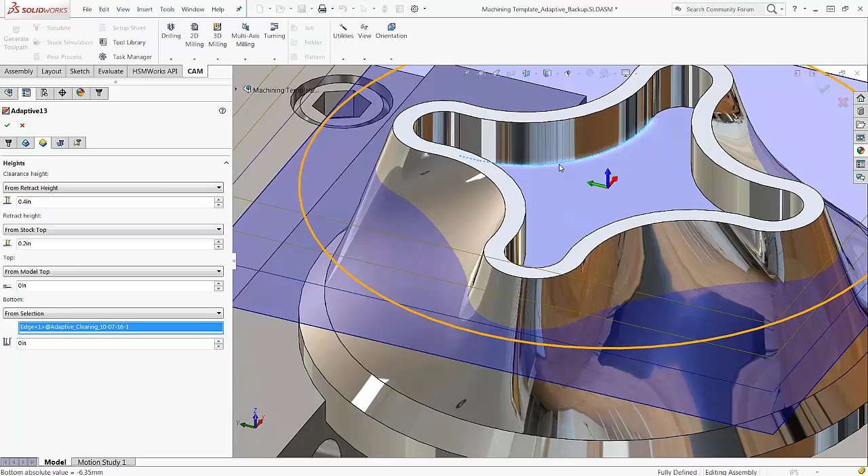So in this case, you can choose these for any one of these. You can select off the model, you can choose where you want it to be. If I want the bottom of the part, let's say, to be from a selection, and I want to select the bottom of the tool to, let's say, that edge, I can select that edge, and the bottom of the tool will be only at that edge.

It won't go below that edge, but that's where the bottom of the tool will go. So I better add two little comments here, because I think there's a lot of new users here, and I don't want them to get mistaken. Everything you said was right, but the first one is the top height.

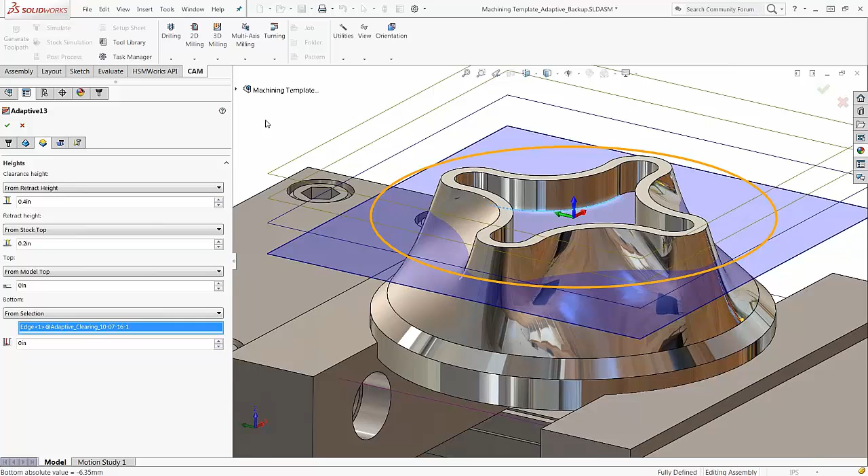The top height is where the toolpath should start, but you may notice if you're trying to get in real close, like a helical ramp has a helical clearance, so even though your top height might be the very top, you'll notice the toolpath starting higher, because on the linking tab you've got a helical clearance value that says start the helix slightly above the top height. So that's something to think about on the top height.

On the bottom height, that's sort of containing the Z limits of your toolpath, it's going to contain the Z level to that height, but if you're doing something like a 3D parallel toolpath, where HSM works, it's high-speed machining. People often thought that was because of adaptive. It's actually because of the nice smooth transitions we do between the toolpath to keep the machine running fast and smoothly. We create smooth linking moves from one toolpath to the other, and that smooth linking move may drop below the bottom height because those heights are containing the toolpath, not the total motion of the tool.

So just keep that in mind. You're not saying the tool will never go below this point. You're saying this is the bottom of the surface that I'm finishing. So back to that point, if there's a vice face or something, add something like a check surface, or add the vice's model geometry so that the toolpath knows it shouldn't gouge into it. So I just wanted to make sure you touch on that when we cover the heights.

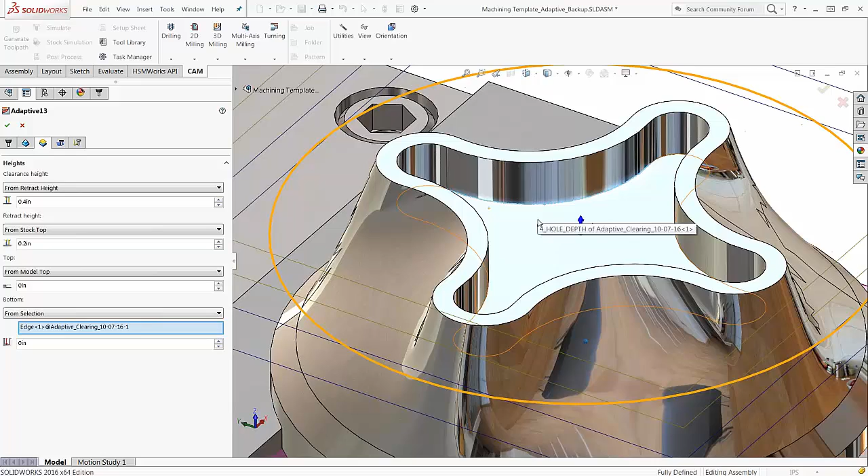Perfect. No, that's great. It's also important to know that it's associative, so try not to hard code it. The retract height is always from stock top. So our default option is whenever it retracts, it goes 200 thou above the stock top, even if you've set 0 to be 50 feet below the part. But in this case, just at the bottom of the part.

I think it's a good thing to remember, because I think a lot of people have an idea that you always have to put your origin at the top of your part so that your retract heights are relative to the origin. You know, an inch up stays an inch above the part. I say that because I like to put my datum at the bottom of the part. Why do I do that? When I flip the part over, it's still the top of the parallel bar, so I don't need to re-pick up Z. And I think a lot of the habits of putting the datum on the top of your part was making sure you had a retract that cleared the part. So bear in mind that default is above the stock, so you shouldn't have to worry about where your 0 is to still have a safe retract.

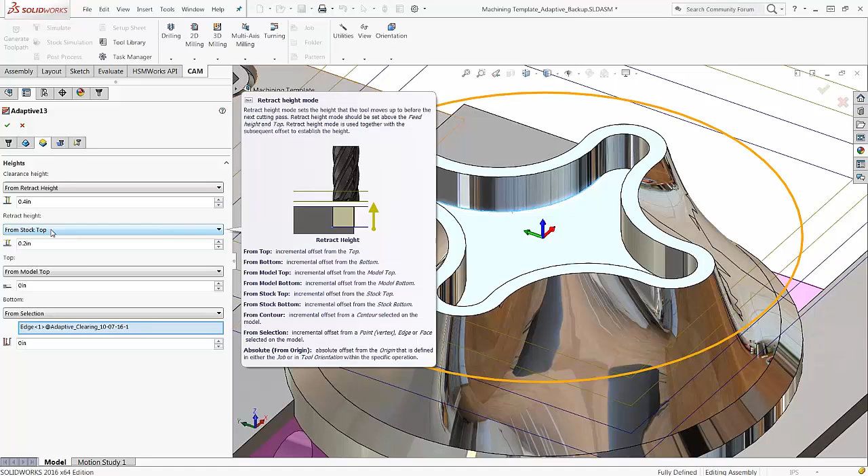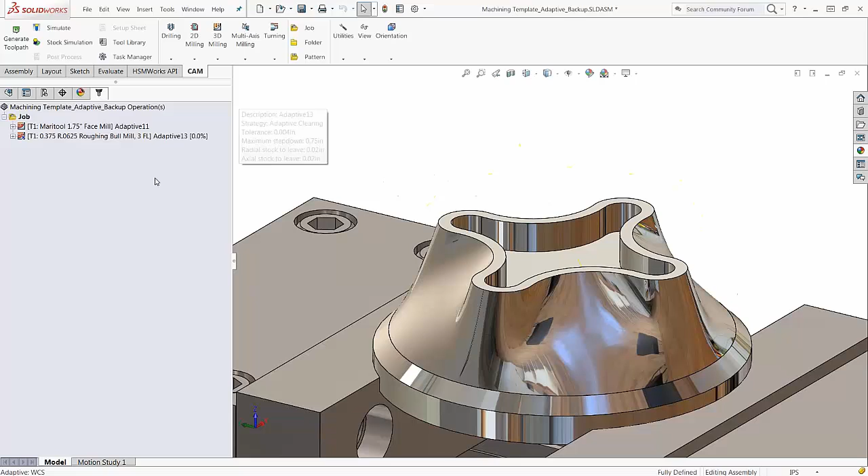There's a question about the upstands. So what do I mean by the upstands? You may have noticed sort of a knife edge that's produced on that last pass when you're sort of adapting into the center, and that's that sliver of material the user's asking about. About a year ago, the toolpath would go right along the edge, and sometimes that would just bend the edge over and it would flap around a lot.

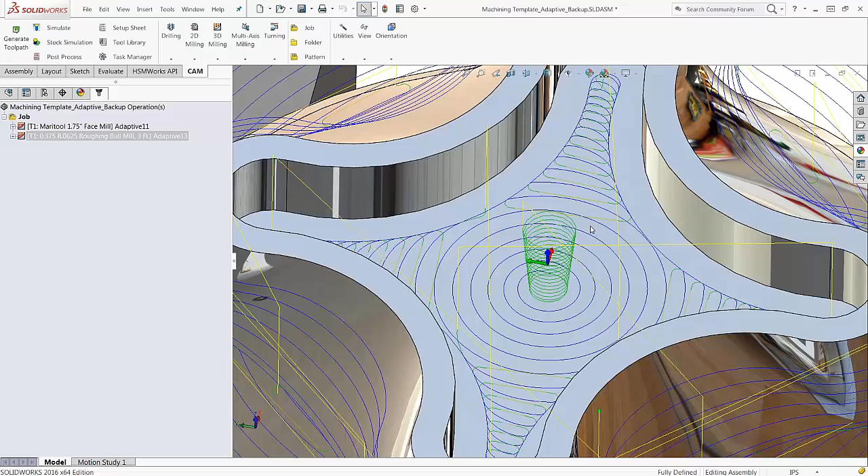We made an update to say that last pass will actually machine past the edge and cut a little bit more along the center, and that got things a little better. I think there's still some ways we can improve it. We have some ideas for how we might attack it, but for now, the update that we've made is there's some overlap of the cutter on that last pass, which we've hard-coded into the software. I say we hard-coded it because it is a value that we could expose to users if we got enough feedback saying that that last pass overlap is something you want control over.

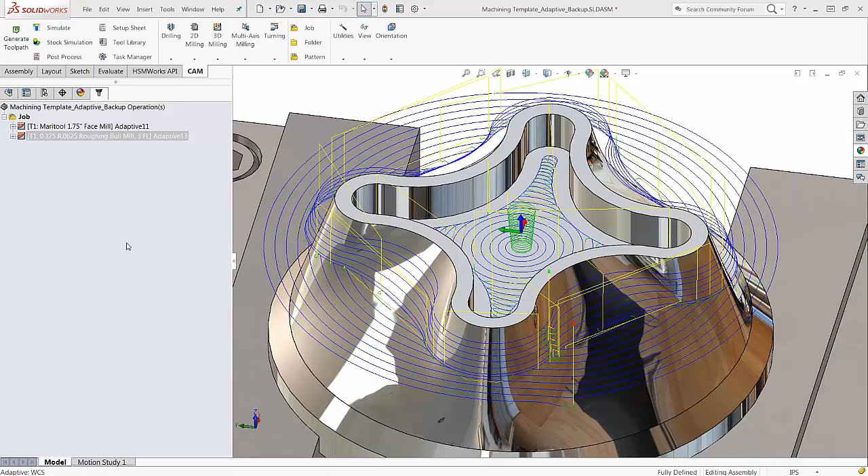Actually, how big a step over can you use? Okay, so this adaptive, and again, I highly recommend, not just because I did it, but watch that video at Pier 9. The thing you want to keep in mind with adaptive clearing is I always say use the full flute of the cutter, you paid for it, and then you're adjusting your step over instead of the step down to maintain your optimal load, the amount of work you want that cutter doing.

The easiest way to look at it is actually every cutter manufacturer supplies peripheral cutting recommendations for what you would have done if you're contouring in a straight line. And even though adaptive is going all over the place, really what we've done is maintain a constant side load. So effectively drive that tool the same way you would drive it if you were just doing a straight cut along the side of the part. And that should give you the best starting point.

And then what I've mentioned in the video was once you've done that first pass around the part, the tool will never see more engagement, so you can start adjusting your speeds and feeds and not worrying that halfway through the cut you're going to bury it into a corner. So it does give you a lot of control over fine-tuning your cut recipe on your machine, and then just make sure you save it.

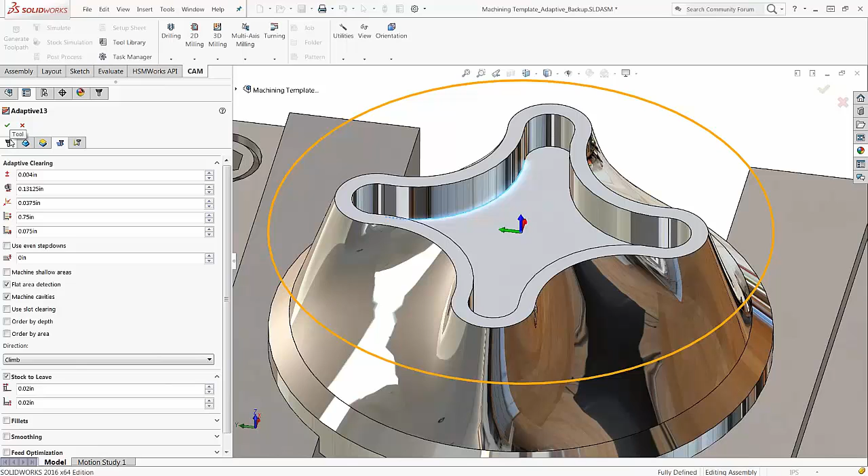There's a question about the first cut around the outside. We do need to make some improvements in the software in this regard. There's not a way currently to have a different depth of cut around the outside to accommodate for varying thicknesses of stock. So for now, the best way to solve that is to oversize your stock in the definition of the setup. Cody, you're onto something. That second half of your statement is the idea we're exploring. It's easier said than done to do it in an automated way, but yeah, that's what we're looking at, is to actually leave the upstand a lot bigger and attack it slightly differently.

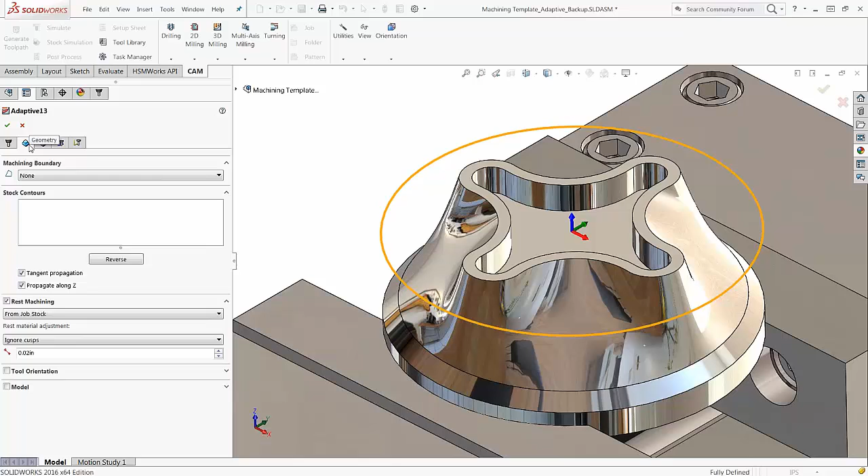Can you avoid areas? Okay, so I actually did a video a little while ago that's containing 3D toolpaths. If you go into this toolpath here, Wayne, and go to the Model tab, you'll see in the Model tab something called a Model Override. This is a little easier to do in the Autodesk products. I'm just going to shamefully say that because we have a lot better direct editing, but SOLIDWORKS has got some of that now too.

What you can actually do that some people don't realize is duplicate the body that you're machining. You can simplify it by deleting the features you don't want to get into, and then for just this specific roughing toolpath, you can drive your strategy off of the simplified model that doesn't have those areas that you don't want to get into. So leverage the CAD environment. It's not just because you have an associative tool. Really think about having integrated CAM as having access to more robust CAD functionality for doing things like that.

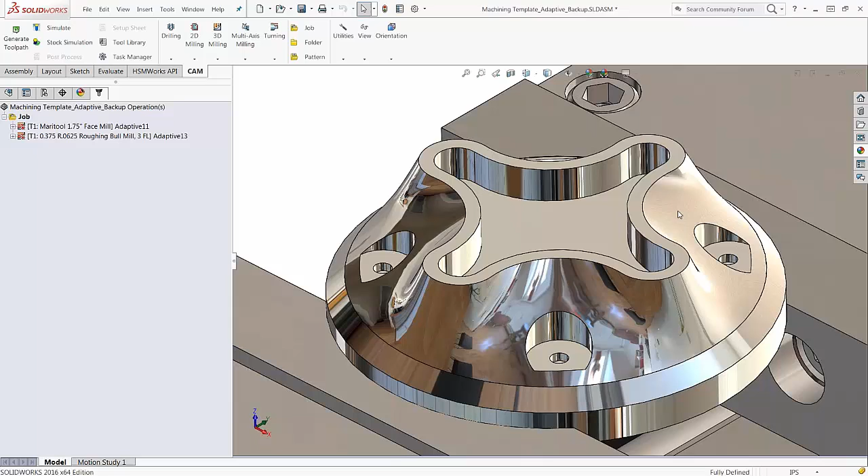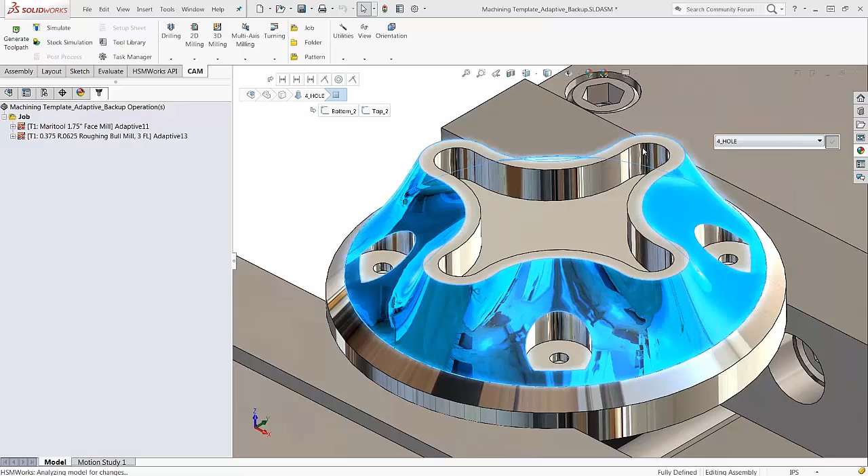There is an option to just automatically not machine cavities with adaptive, but I think your question is more, I want to get into the big ones but not the little ones. What I've often done was I create a configuration in the part that simply has those components or that feature removed, and it makes it easier for me to just machine this nice and smoothly, and then I'm able to turn that configuration on as I need to be able to cut those additional features. Yeah. Now, if you're in SOLIDWORKS, because you're not going to have multiple configurations on at the same time, Wayne's in an assembly, so you can stack those parts on top of each other and access each of them.